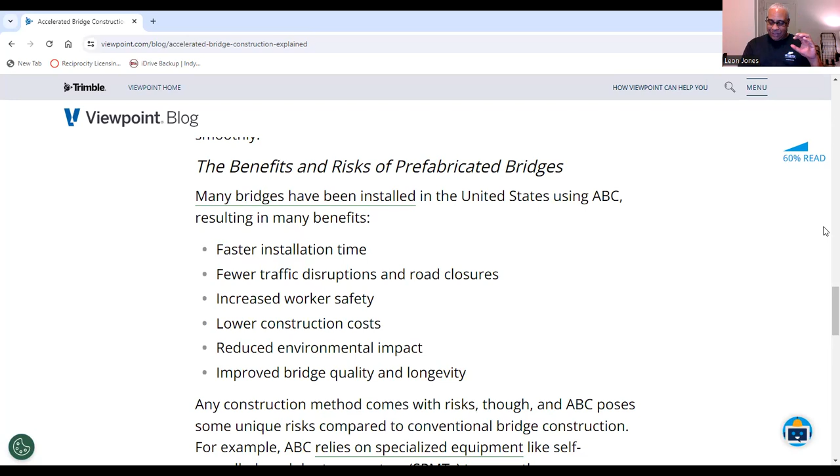Many bridges have been installed in the United States using ABC, resulting in many benefits. We're going to get faster installation time, fewer traffic disruptions and road closures, worker safety will be increased, construction costs will be lowered, and there will be a reduced impact on the environment. And the lifespan and the quality of the bridge are also going to be improved.

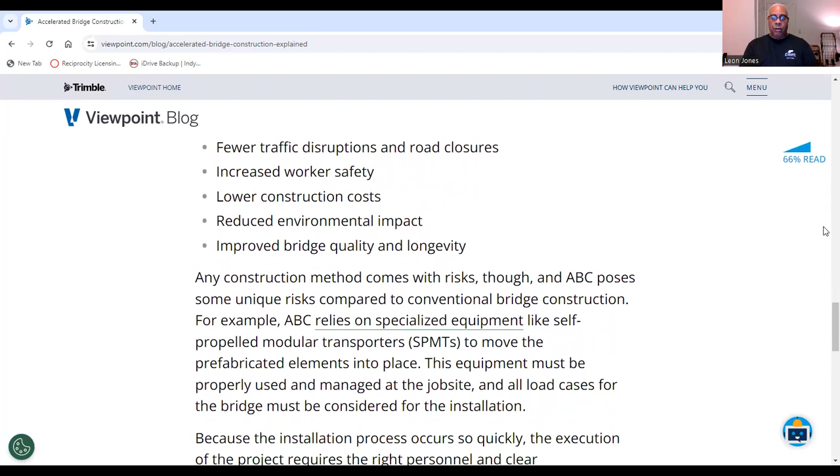Now, with any construction method, there are risks. Again, with any construction method comes risk, and ABC poses some risk compared to conventional bridge construction. And here's why. When we utilize ABC, you must have specialized equipment like self-propelled modular transporters to move the prefabricated elements in place. This equipment must be properly used and managed at the job site. All load cases for the bridge must be considered for the installation.

Because the installation process occurs so quickly, the execution of the project requires the right personnel and clear communication to reduce risk. You must understand this is very important. Whenever any type of new construction method is used, having people with the right knowledge and experience is crucial. So any contractor thinking of using new methods like ABC, you need to do your homework.

Now also, keep an eye out for the investigation results. Some engineers have pointed out that the bridge at FIU used an unusual design, but it's too early to say whether that played a role in the collapse. So I'm not going to jump to conclusions and blame ABC for what happened. But any contractors or organizations like design firms thinking about ABC for future work should be on the lookout for the results of the FIU pedestrian bridge collapse in Florida. Why? Because they may provide some insight into what risk factors require extra attention during this type of project.

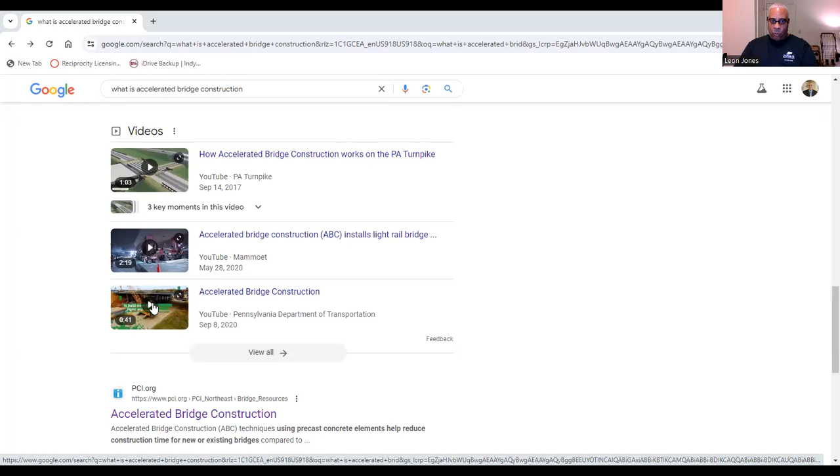Fair use. Let's try to get a little bit of videos in here. And here is the first video. Let's do the short one first. This is from PennDOT. I used to work for PennDOT. It's a 41-second video. I even have some more videos here.

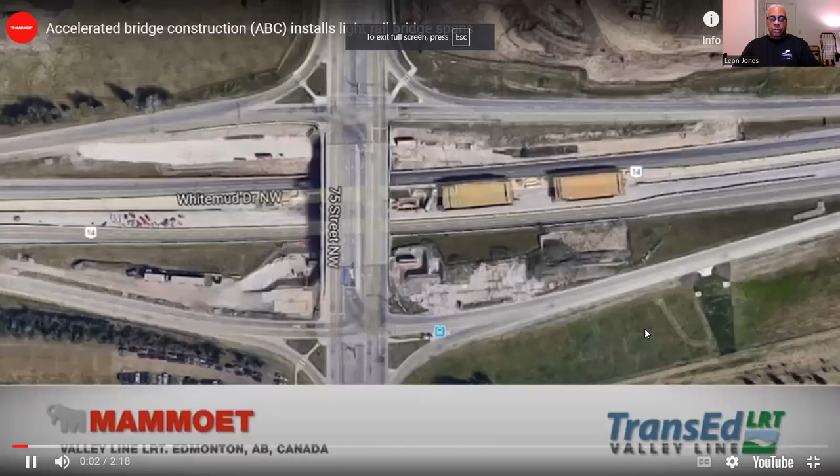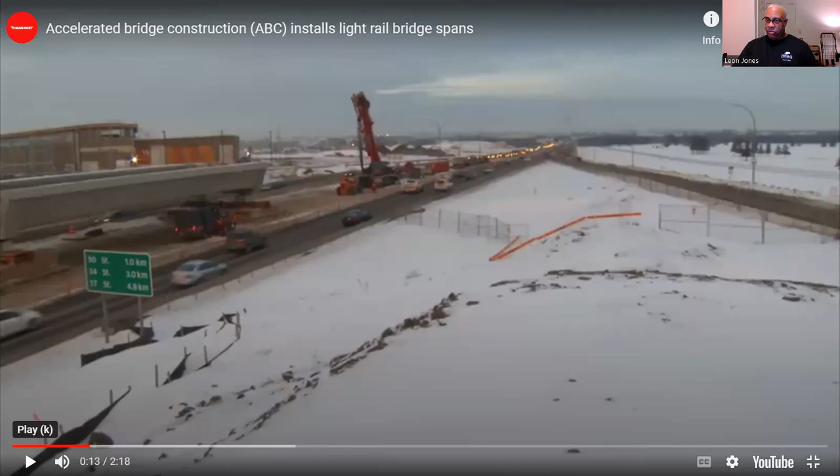Let's do this one with the railroad bridge first. See how it's done with the railroad bridge. Fair use. And by the way, this is a rendering of what the process looks like. Fair use. Let's continue.

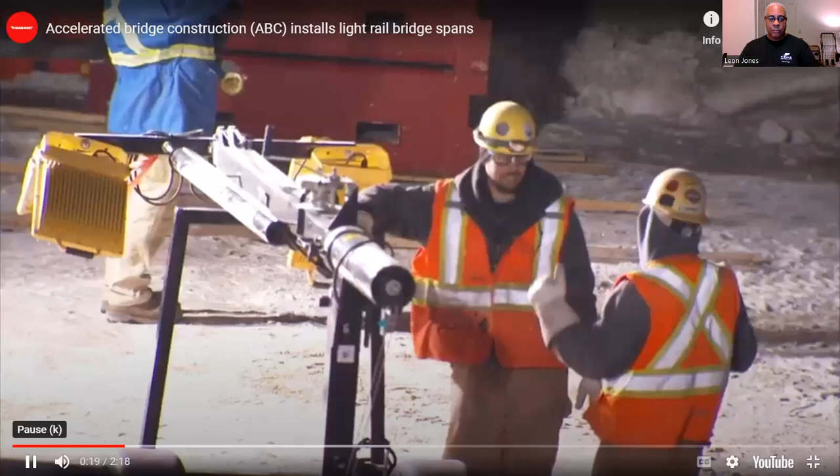And let me go back again to address the introduction. Let me make my correction here. That was the rendering of how the process actually works. Now you're going to get an idea of how they put everything together. In fact, this is almost like taking a box culvert. It's post-tensioned, and what it is, you pull the cables together, you seal it while it's in place. Let's take a look at this concept called accelerated bridge construction. Fair use.

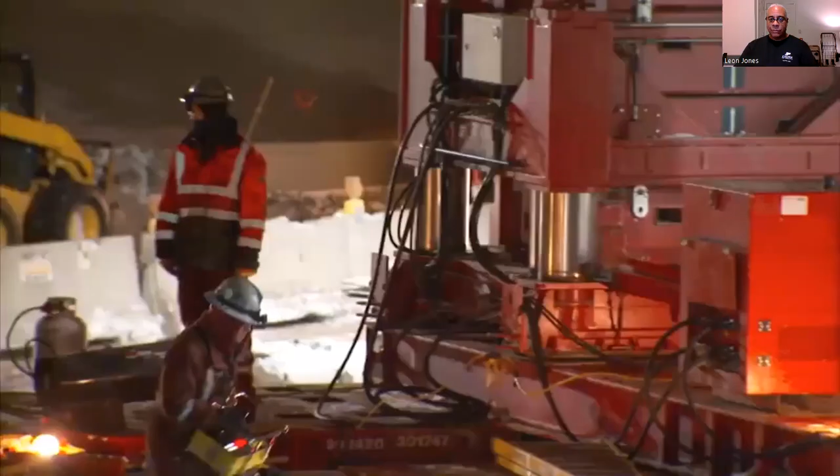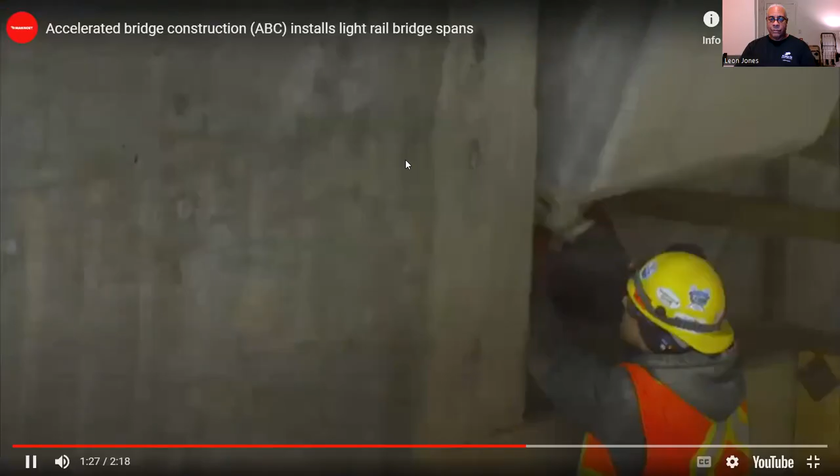See how they're sliding everything in place. Now, this bridge must be over there in Canada because it is snowing heavily over there, very cold. And generally, here in the United States, they do not install bridges during the winter time. And this is a light rail bridge, and they're installing it in spans. Let's continue.

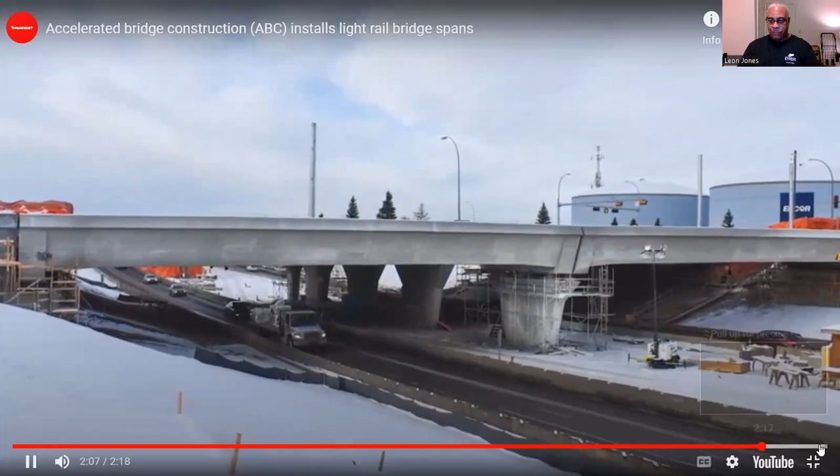All right, let's get some more. Let's go to this one. This is from the Pennsylvania Turnpike. Fair use.

I'm sorry for the silence. This video is very silent. You're just seeing a rendering. Let's find another one here. This is from the Michigan Department of Transportation. Fair use.

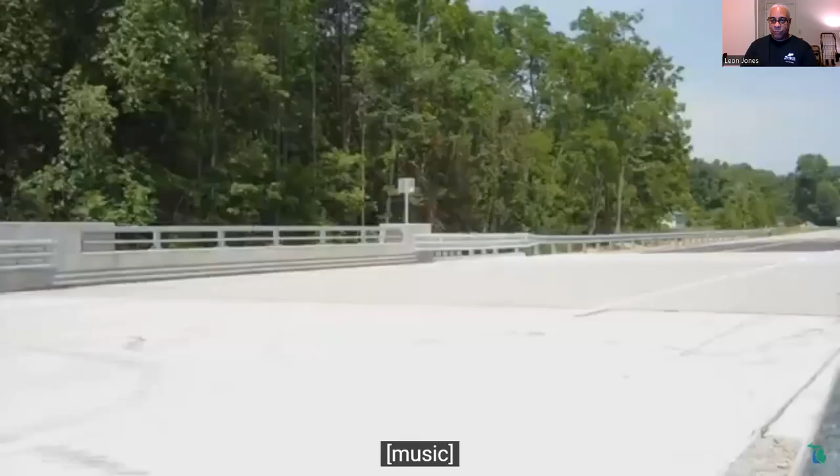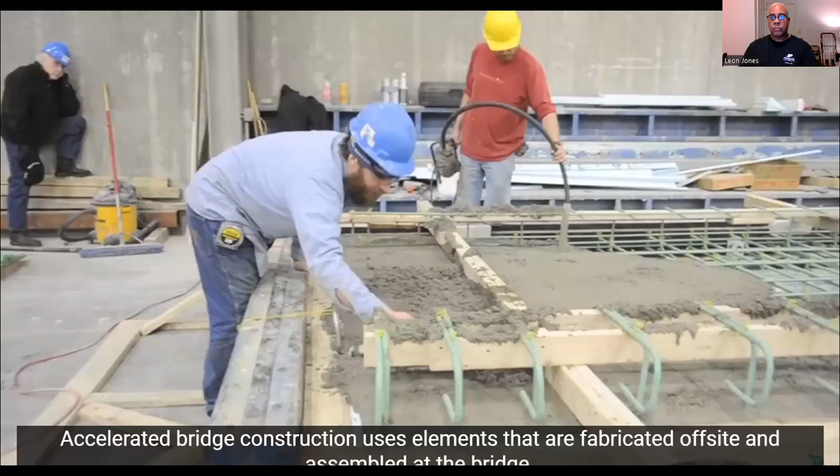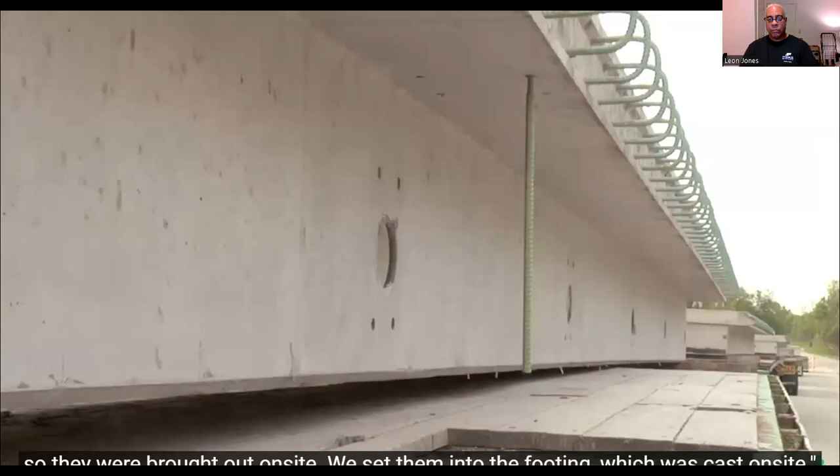The $1.5 million M25 bridge reconstruction project over the White River in rural Huron County was completed this summer using the latest technology in bridge building. Accelerated bridge construction uses elements that are fabricated off-site and assembled at the bridge. The abutments were precast. They were made in the factory, so they were brought out to on-site. We set them into the footing, which was cast on site. In addition to more consistent quality, the use of precast materials saves time and money and reduces motorist delays. The detour for this project was removed 3 weeks earlier than it would have been with traditional construction.

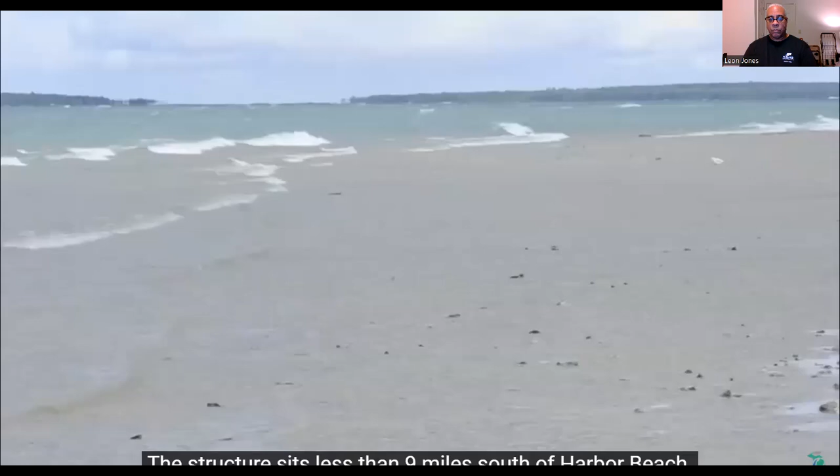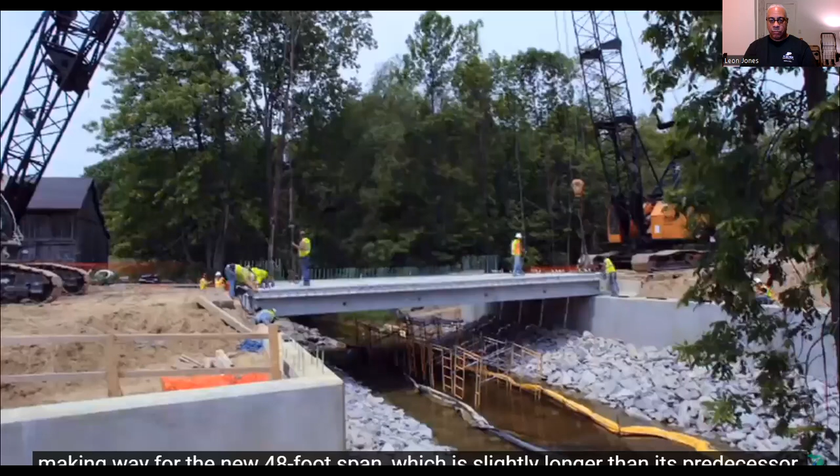The structure sits less than 9 miles south of Harbor Beach. The original bridge was built in 1952 and removed in late April, making way for the new 48-foot span, which is slightly longer than its predecessor. 8 concrete box beams were put into place to create the 2-lane bridge. Steel cables run through the beams to hold them together. Once we get the beams set into place, we'll pour the diaphragms, we'll pour the back walls that go between the beams over the abutments, and then we'll put the post-tensioning cables through the conduit you see in the beams, and then we'll tighten them together, and that'll hold the beams from separating. The Michigan Department of Transportation is dedicated to providing the highest quality integrated transportation services for economic benefit and improved quality of life.

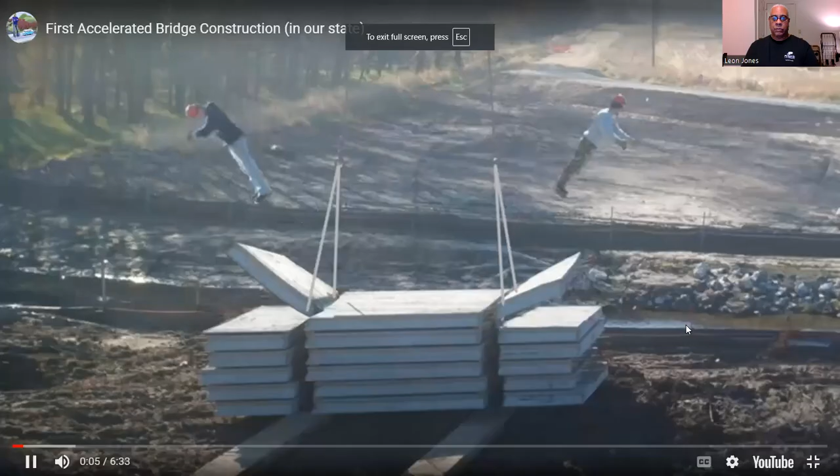I want to talk about a bridge I designed almost 20 years ago. It was the first ABC, or Accelerated Bridge Construction, bridge in our state. The goal of the project was to build a bridge as fast as possible using accelerated bridge construction. There wasn't a lot of information at the time for ABC bridges, so this was a demonstration project.

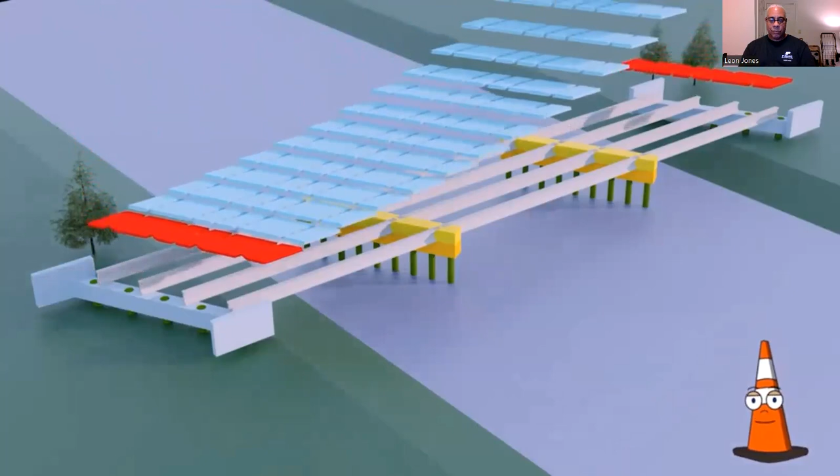It was felt that manufactured precast parts assembled on site would provide the fastest construction timeline. So I came up with this idea of individual precast panels tied together with post-tensioning and pre-tensioning. So I started with this little cardboard cutout I'd made on the left. This is before 3D really became available in the office. So this is my panel here on the right. This is one half of the bridge, and we're going to tie it together with different techniques.

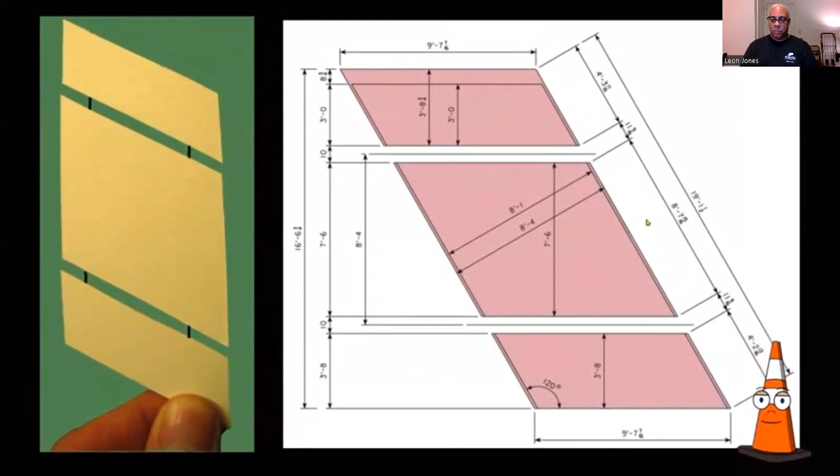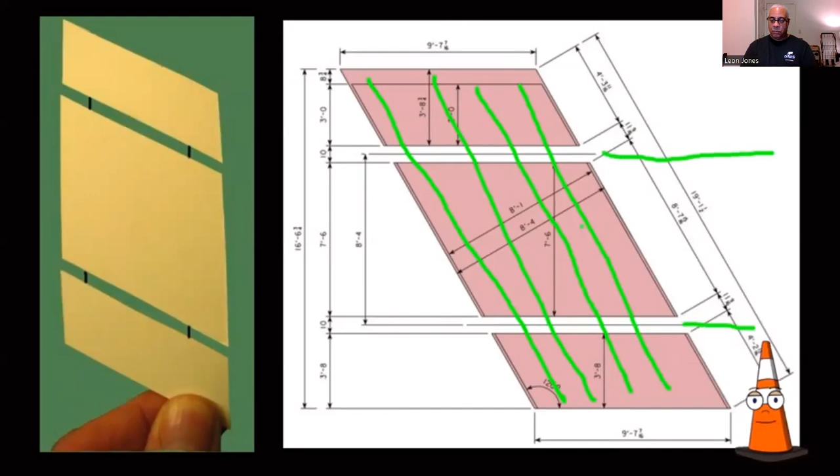What's going on here is there's pre-stressed strands that are going down like this. There's 4 of them. Panels were pre-stressed in a factory. Then we're going to lay them out. They're going to sit on the beams right here. This is the center line of the beams. And then we're going to post-tension it right along these channels. So here is one of my panels, and you can see.

Again, when you hear the term post-tensioning, that method is used to hold everything in place. Again, box culverts use post-tensioning. Now, all of these components are prefabricated. That means they're made in the factory and then shipped on to sites. And the ABC method, they also have the other method where they actually slide the bridge in place. Then you have the box beams, and mainly what you're seeing here are box beam bridges.

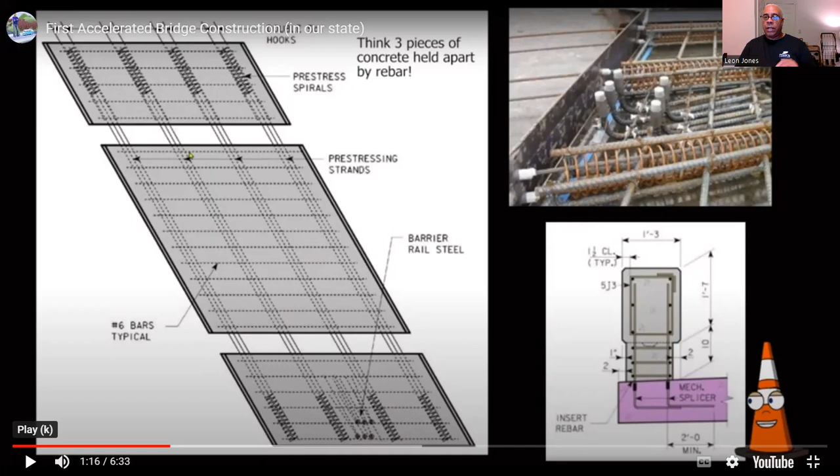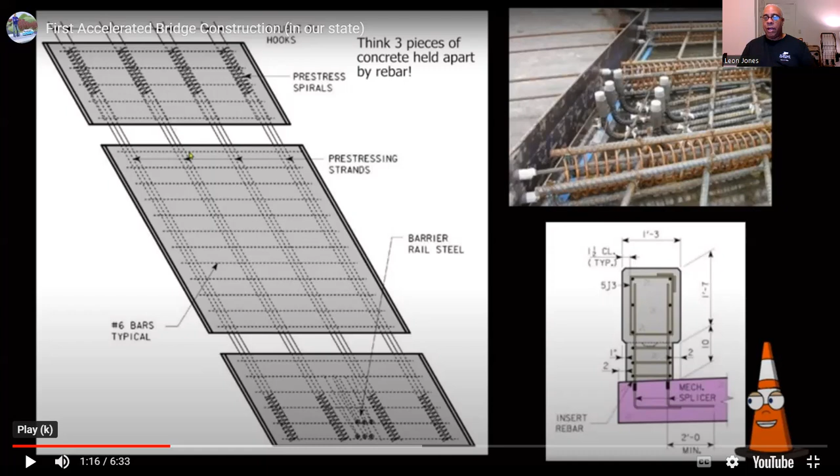But you're seeing how long it takes to construct this bridge, and you'll see how cost effective it is. Now, again, there are a number of states that are using this method, but it does have its flaws. Again, the FIU bridge, which is a pedestrian bridge, that should give you an insight regarding the risks.

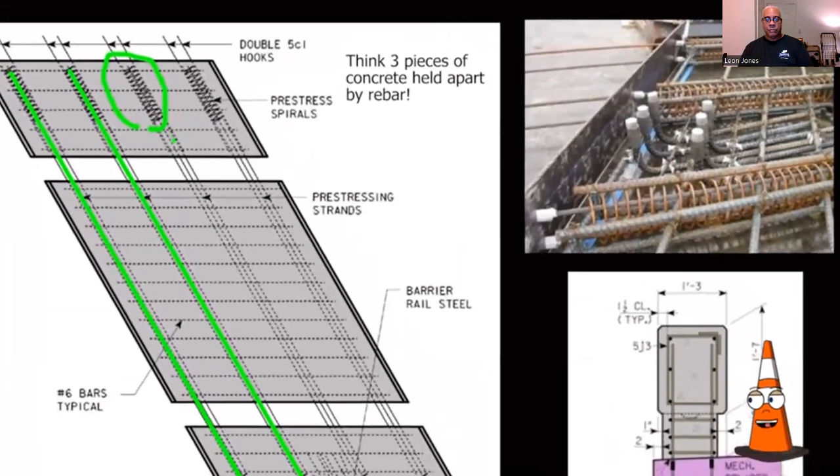Fair use. Let's continue. See, this is where we pre-stressed it. There's 4 of these. And if you look, you can see these coils. We had to put these at the end because to get development length for these pre-stressing strands, we were worried about it bursting out. So we had to put these coils around it to contain all the stress that's in there from the pre-stress. Again, these are going to be the channel where the beams are. And if you look down here, these are the connections for our posts that help with the barrier rail.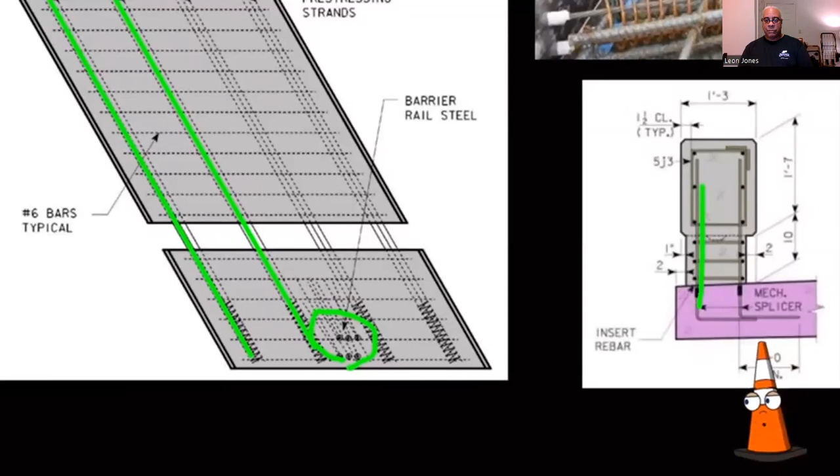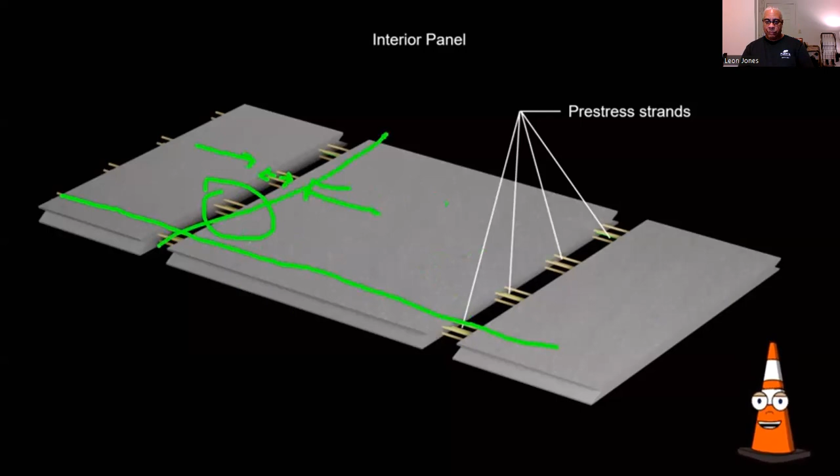It was a bit of a challenge to design this so that we had the pre-stress in here. And then these bars right here, they would hold this thing apart. So they'd have force like this and like this. And then the pre-stress would have all this kind of force on these sections. And I was worried, if you saw the video at the beginning, that these things would buckle when they were being lifted, but it all seemed to work out.

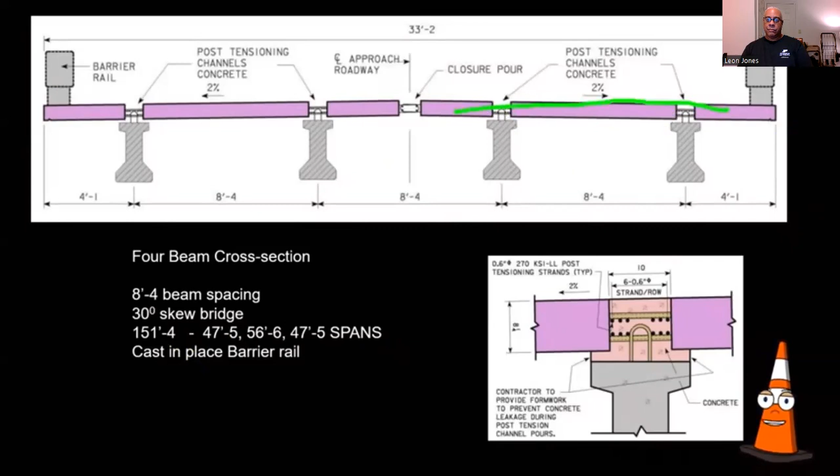Here's a cross section, 4 beam cross section, 30-degree skew. You can see the span, 151 feet, 4 total short spans. Barrier rails on the outside, and you can see how the panels, so this is one section, one panel on one side and another panel on another side. And you can see in here, this is where all the post-tensioning is going to go right in here.

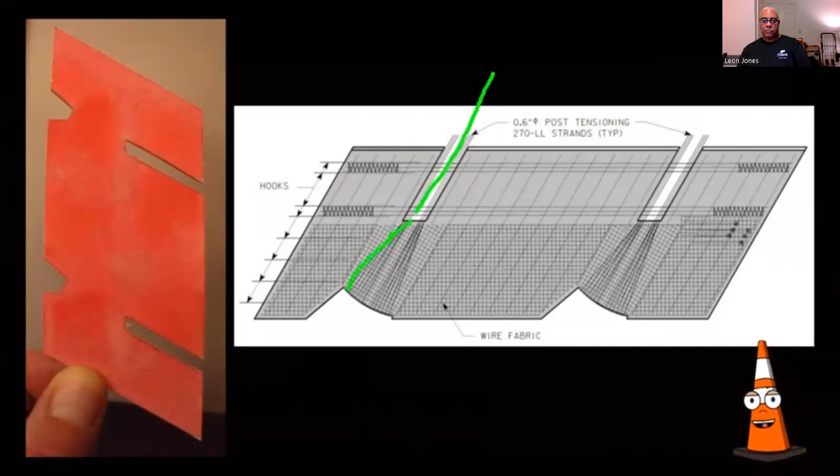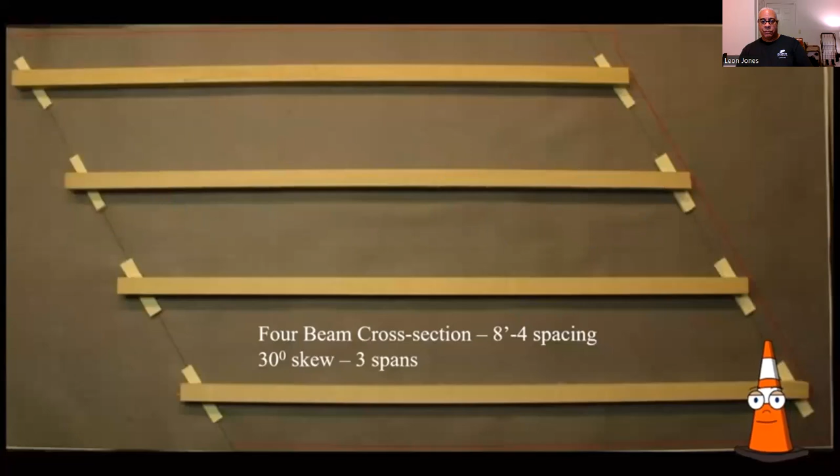Here's an end panel. And what we needed this for is once we fed the strands through the channel the whole length, they had to be splayed out so that you can actually get the machine to work. And then we did a closure pour to tie all these strands so they wouldn't move. So I mentioned this was before 3D computers. I had to build a little model to explain it to people.

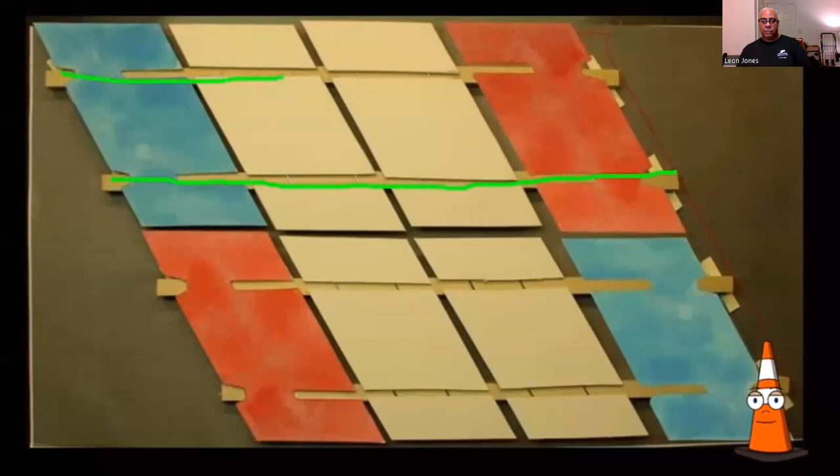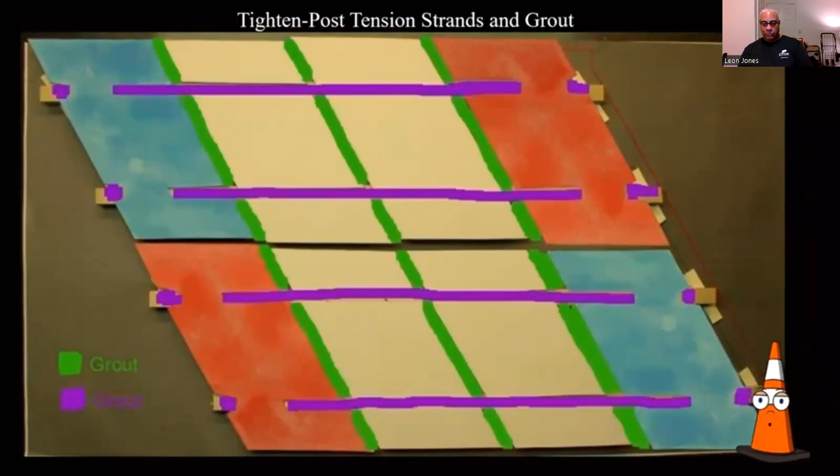So there's the beams. This is the end panel that you would put on. Then you put the interior panels. And you can see here, this is where the post-tensioning is going to go through the channels, right through here. Before we could do that, we had to pour closed all the transverse channels, not the center channel, so that when we put pressure on it with the post-tensioning, it would squeeze everything together. There's the post-tensioning coming through the channels, then we'd grout or fill that with concrete, and then we'd finish with a closure pour.

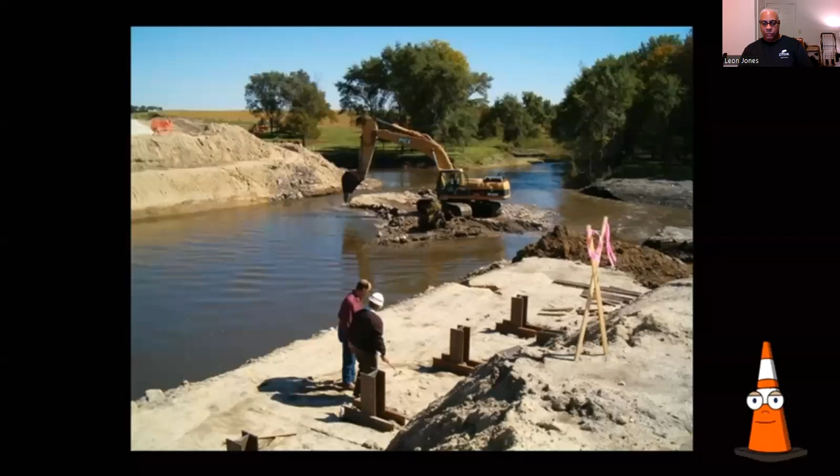Unfortunately, the bridge we had to replace was a marsh arch. These are pretty famous. It's a beautiful design, lasted for many years, but the problem with all the big machinery that farmers have, they couldn't fit through it and they kept damaging the marsh arch bridge. So we removed the bridge, started putting some piles in for the abutments, put a couple of studs on it because the abutment's going to be precast, it's going to come on, and then we're going to grout it or concrete it in to these studs.

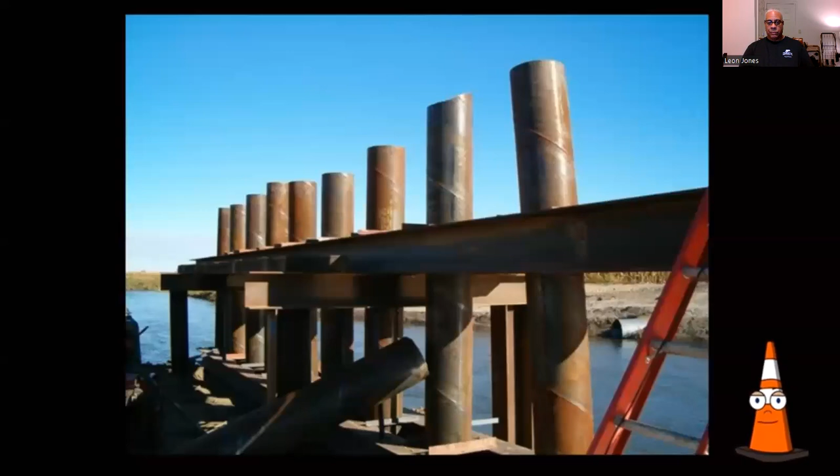We had pipe piles for the piers. Had to design something, a pier cap that would come and just sit on it. You can see this is when they were pouring it. This is lifting it into place, putting it over top, filling it with concrete, making the connection between the precast and the pipe piles that were there. You can see how it looks.

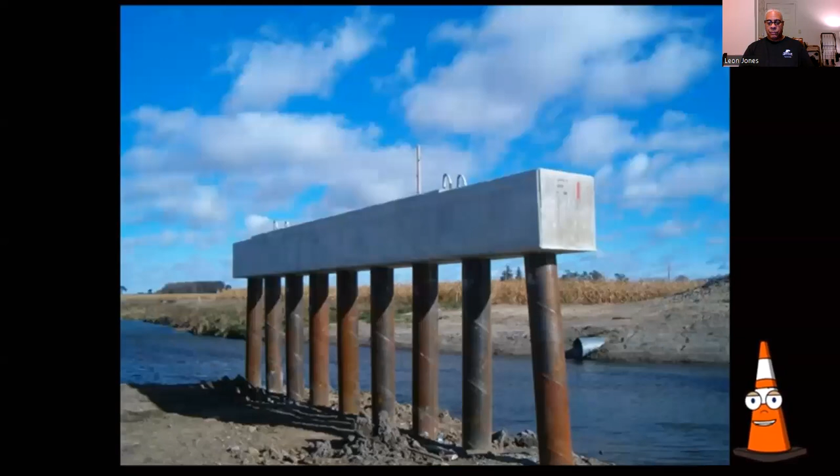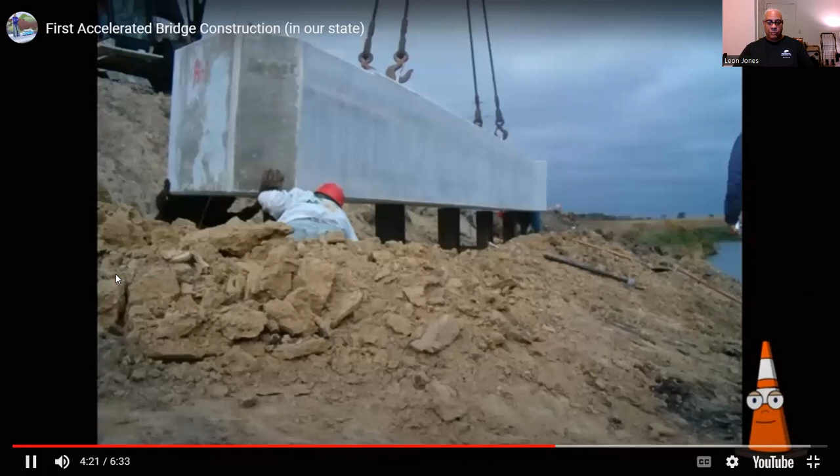This is an abutment. It's precast. Same technique. We came and we put it over top the piles and concreted in these different holes here to make the connection. You can see they're dropping it down. Now this is amazing because generally abutments, yes, you will use pipe piles or you'll use I-beam piles. And then you will use, again, some type of MSE structure to retain the soil.

Because when you have pressure with soil, here's what it looks like. Okay. You have your abutment and you have soil. Now, your pressure is going to be triangular. So that means your centroid is going to go up about maybe 1/3. So it looks like this. It's a triangle. So in statics, you're going to go ahead and use that formula. You're going to find all the moments and you're going to find the forces. And in fluid mechanics, you'll have the same type of problem.

But basically, you have the retaining wall structure through the MSE panels to basically hold back that soil, because that soil produces a lot of pressure and it can cause a cave-in. Now, that's building the abutment the traditional way. Again, with the piles. And generally also, abutments can be built across water by diverting it.

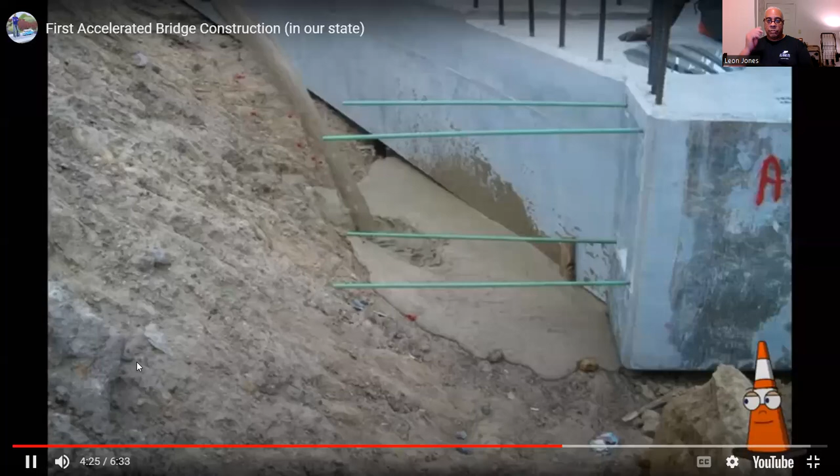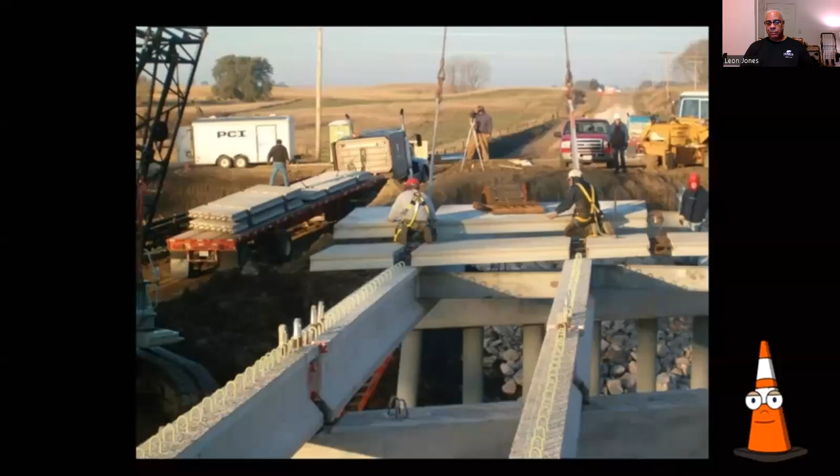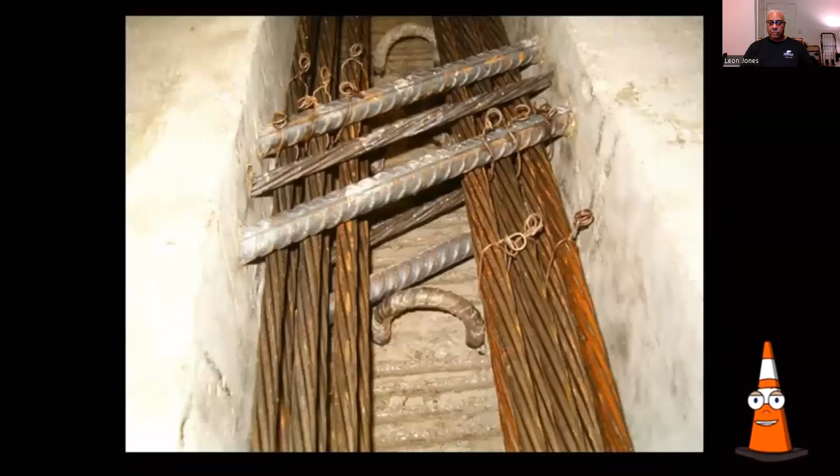Starting putting the panels down, see how they go. And I designed them so they sit right over the beam. That's where the channel and the post-tensioning cables are going to go. These are little adjustments so we could sit on top of the beam and make everything nice and level. Pouring the transverse joints, putting the post-tension cables down the channels so we can tie it all together. Come through the end panel. You can see they can use the machine to pull it really tight. Then we're going to concrete those joints up.

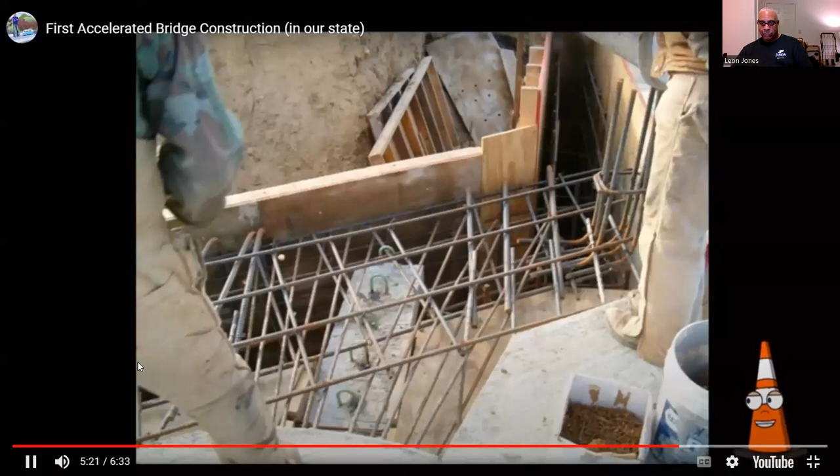Once everything is done, we pour the end section and tie all the post-tensioning cable into this so that it's one unified mass. And there's the final bridge. The cool thing about the design in my mind, because I designed it, was this whole bridge was in compression no matter what the load was put on it. That's pretty rare because when you're on a bridge, typically you get tension in the beams and different things, but there's so much post-tensioning in it, so much pre-tensioning in it that it's all in compression. Theoretically, it should never fail because you'll never get a tension crack.

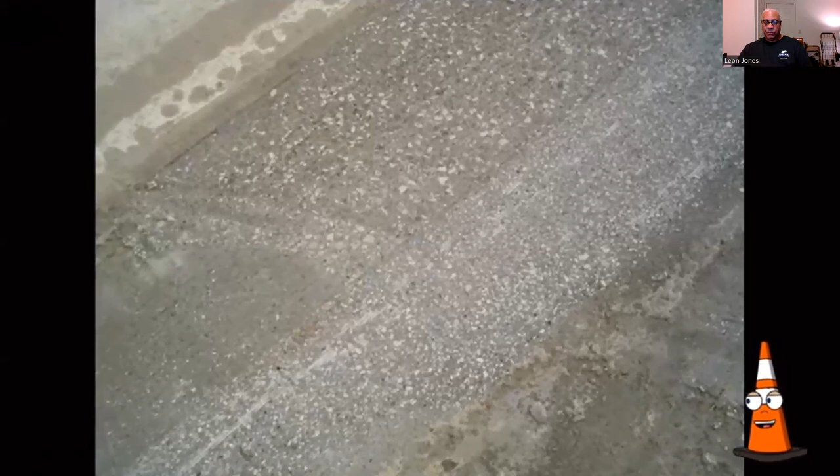We made the panels a little thicker so that you could come by and grind off not exactly level, and it gave it a bit of a roughness to the deck. You can see the rest of the bridge. You can see how we did the transverse.

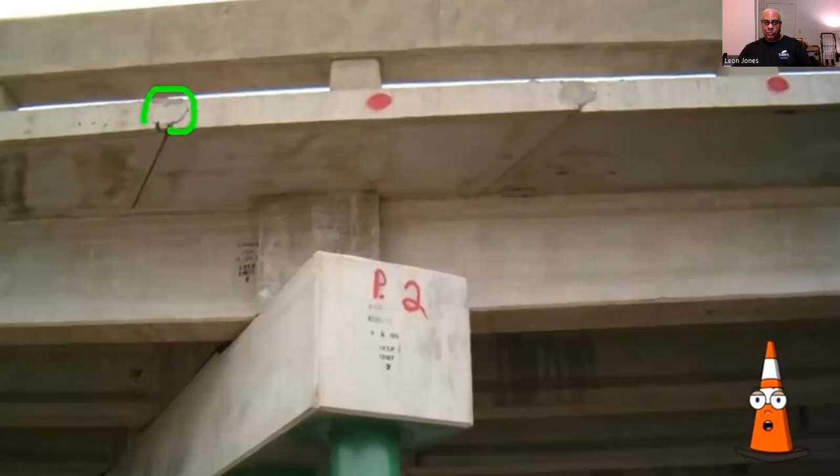We poured those joints. The post tensioning gives all this pressure, goes along. It's actually going to be compression in the whole thing, but that's what we did. Poured the diaphragms at the piers, abutments, and there's the bridge. So like I said, this is the first one that was ever done in our state. It was unique, and as far as I know, no one has ever built something like this again.

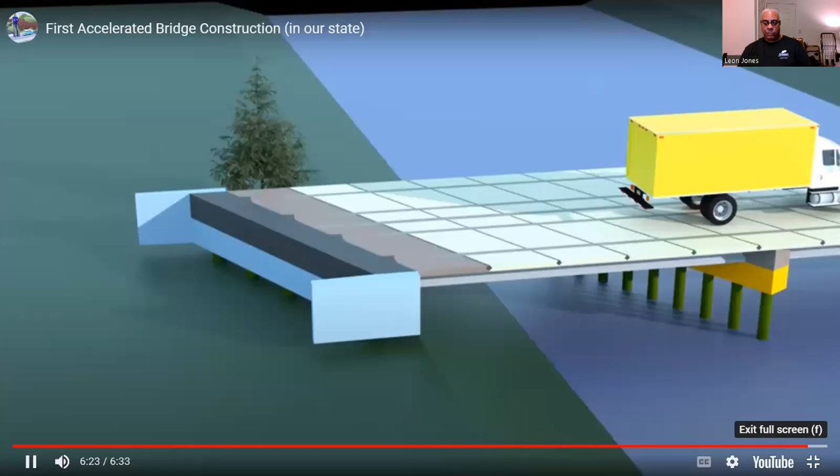All right, let me see what I can find, see what goodies. Let's go to this 40 second. This is from PennDOT, my old employer.

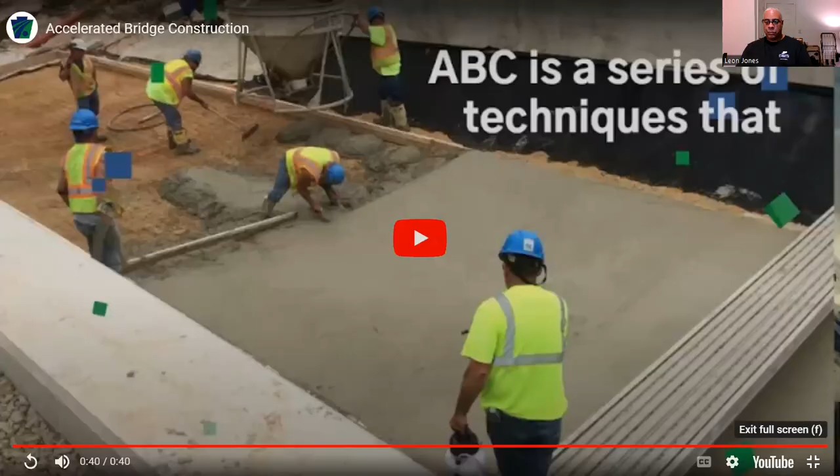And that's what accelerated bridge construction looks like. It is a good technique. Now, I will say this, even though they actually build this structure at the factory, you're still utilizing concrete. Concrete must be tested. There must be samples taken. You need to know the load because it is a bridge. It is a structure. So you still need to do your slump. You still need to do your air. You still need to do your temperatures.

And also, when you go out and inspect this type of bridge, you inspect it the same way that you would a conventional bridge. I mean, for this type of construction, since there was a collapse back in I believe it was between 2016 and 2018, a pedestrian bridge in which there were fatalities. Well, you need to know what the breaks are. Are they using cylinders? That's the first thing you need to know. Or are they using beams? Beams give you that flexural type of test.